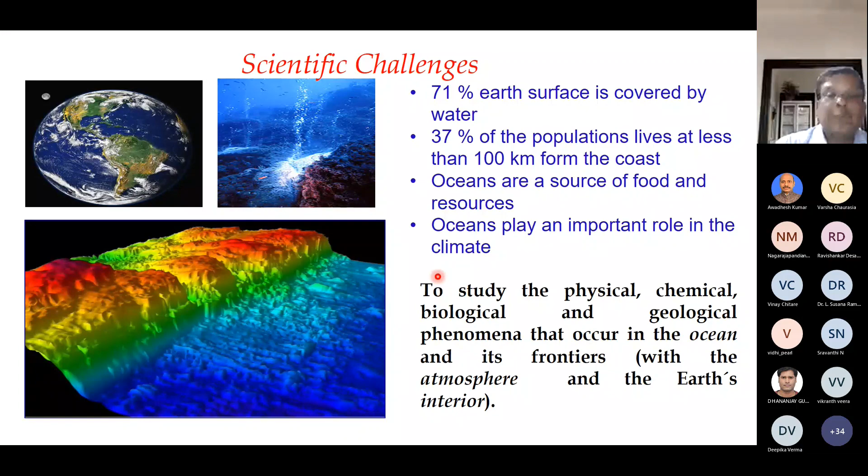So the research that is very challenging today is on underwater vehicles for oceanic exploration. So this is a scientific challenge that is addressed by marine vehicles, and we may note that a single autonomous or marine robotic vehicle may not be adequate to be deployed for a task that is not possible with one vehicle.

Rather, you can deploy a group of marine robotic vehicles for accomplishing a cooperative control task, so the navigation and control of such kind of robots is a challenging task to have this oceanic exploration.

So the classical method to explore the oceanic environment, the first one I display here is a vessel, marine vessel. This marine vessel is okay with some excellence towards the exploration activity, but it has poor maneuverability, and the three-dimensional coverage and time coverage is also not that impressive. Also, it involves high operational costs.

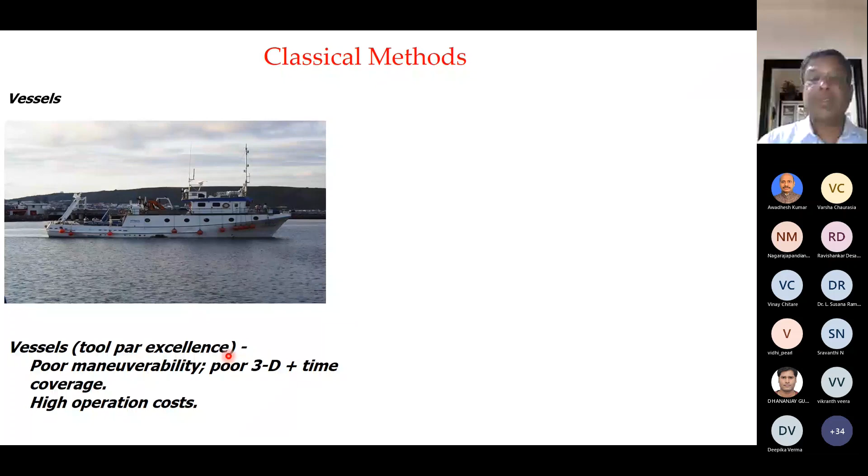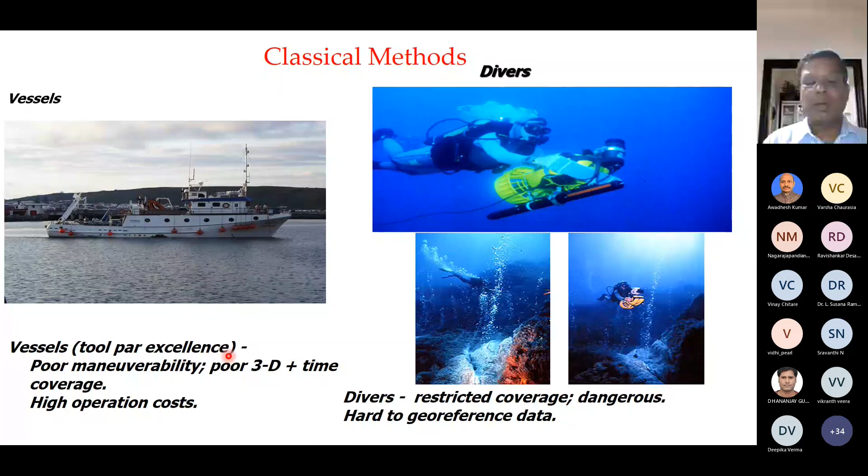On the other hand, we could deploy a diver for such exploration activities. But it may be a restricted coverage area, so a diver may not be able to cover a large area, and sometimes it may become dangerous, or it may be hard collecting the georeferenced data as well. So therefore,

after these kind of vessels or divers, the thrust was given to design remotely operated vehicles where the umbilical cord is a link to control the remotely operated vehicle. But gradually it was felt that to make it autonomous, we need to use the computing, control and all sensor technology, so that this underwater vehicle could be deployed in the oceanic environment for the exploration.

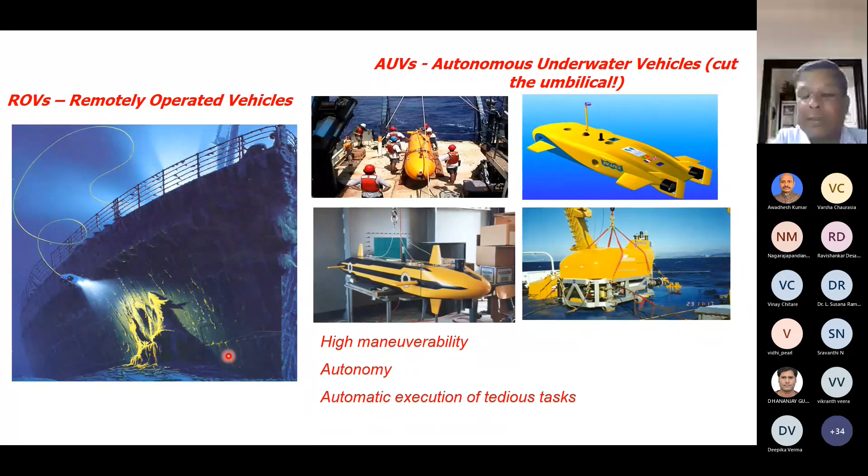And it is observed that these kind of autonomous underwater vehicles have high maneuverability, and good autonomy is established to accomplish automatic execution of tedious tasks. And the marine vehicles, if you look at it, they could start from the marine craft, which are very small ships or submersibles, and vehicles that do not travel on the land. They are only restricted to the oceanic environment, and they are called crafts.

So the vessel is basically a hollow structure that is made to float upon the water for the purpose of transportation and navigation, and it is larger than a rowboat. So the words vessel, ship or boat are often interchangeably used. A ship and a boat are basically different in terms of their size, by virtue of the following definitions as mentioned in the Encyclopedia Britannica. So that is one, the ship.

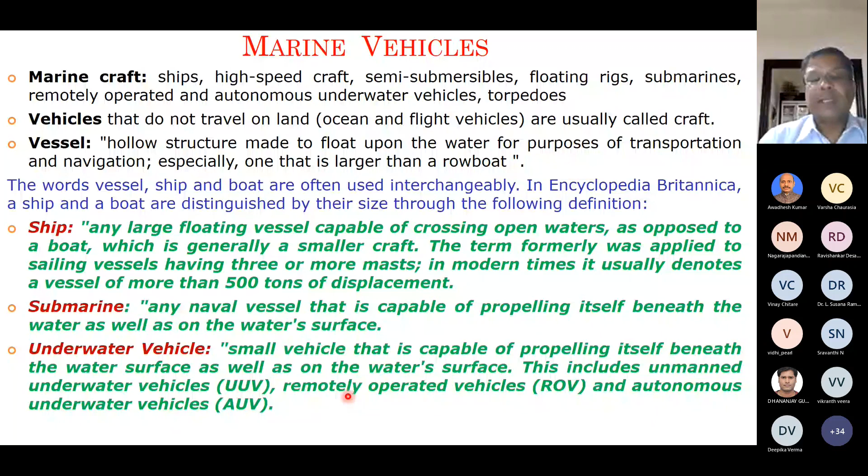The ship is basically a large floating vessel that is capable of crossing open waters as opposed to a boat, and basically it covers more than 500 tons of displacement, whereas a submarine is any naval vessel that is capable of propelling itself beneath the water as well as on the water surface itself. And the underwater vehicle is a small vehicle that is capable of propelling itself beneath the water surface as well as on the water surface.

This includes unmanned underwater vehicles or UUV, remotely operated vehicles or ROV, and autonomous underwater vehicles called AUV. So basically we have three marine vessels or marine vehicles: the ship, the submarine, and the underwater vehicles.

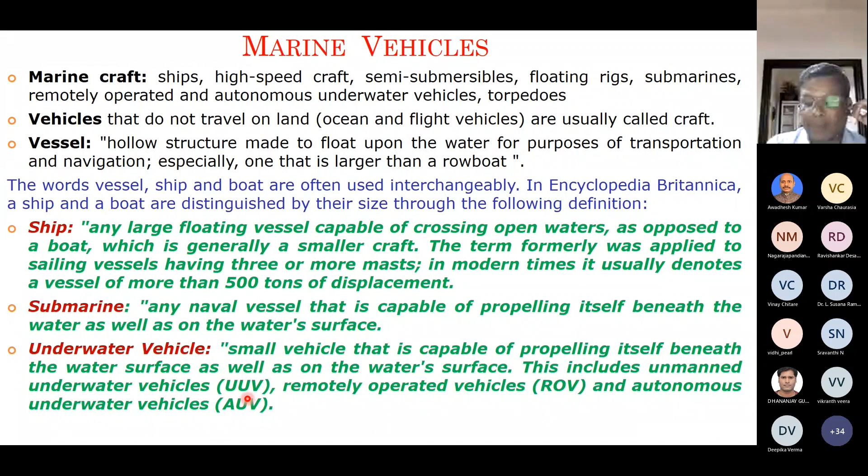Now the problem before us in underwater robotics: the first problem is, what force should I apply to achieve the desired speed? That is the control problem before us. And the second problem before us is the guidance. That means, how should I steer to follow the desired path? And next, what path should I follow? That is the path planning.

And where are the amphoras? So where is the mapping? Means you want to find out the sea floor, these aquatic animals there. You want to map the sea floor. And where am I in the motion, the navigation problem.

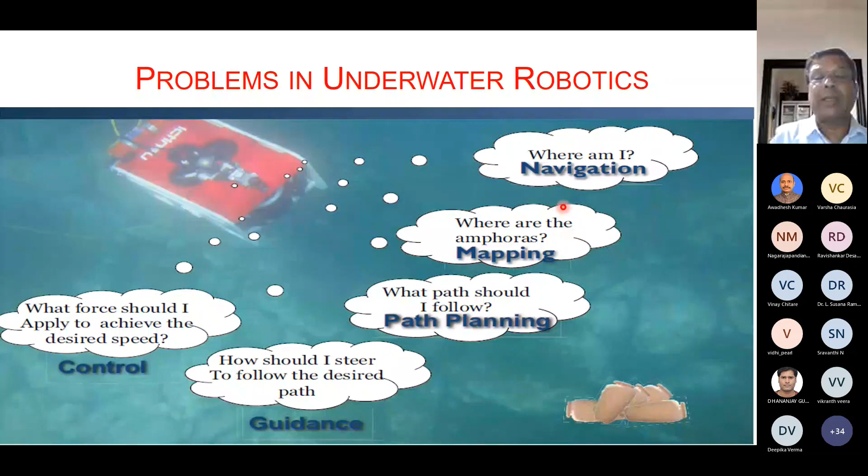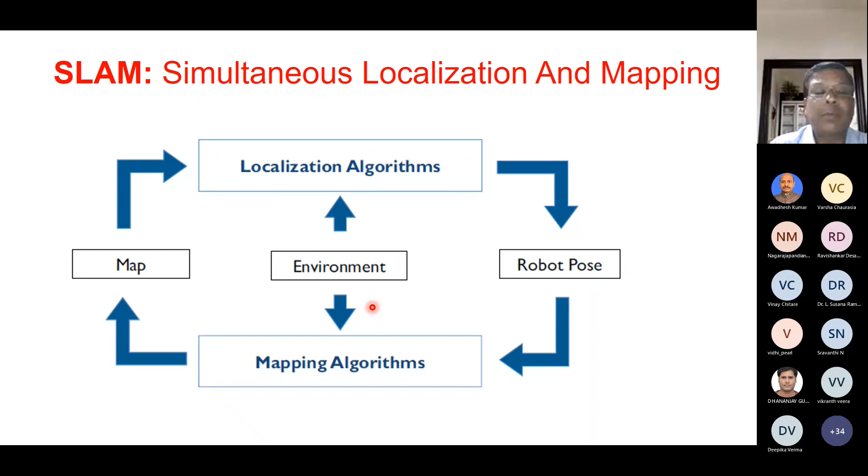So these are some of the problems that we encounter as far as underwater robotics is concerned. Now, one very interesting problem is called SLAM, that is simultaneous localization and mapping, where the objective is to design the localization algorithm so that we take care of the robot pose, and through the mapping algorithm you can map the sea floor, and of course the different environments inside the sea, what is there and how to map them by virtue of the localization algorithm. And the navigation problem is basically concerned with estimating position, orientation, and velocity of a vehicle.

The inertial navigation system, or INS, is a very popular sensor that is used in the navigation problem. In INS, three accelerometers are used for linear motion estimation, and three gyros are used for angular motion estimation. But these sensors are very expensive and they require accurate calibration, so there could be some drift in the position estimate over time. So we measure acceleration and angular velocity, and compute the linear velocity, position and attitude; this is what we are doing with respect to the navigation problem.

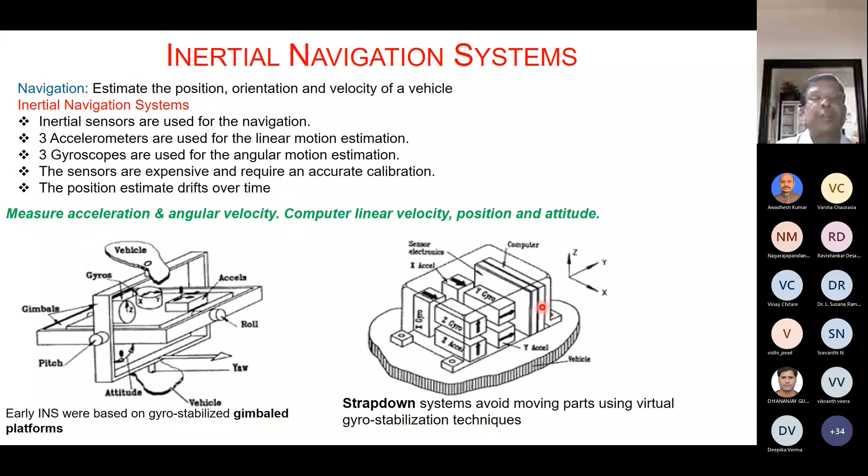And these are the two figures that show the earlier one and the new one in the INS, where no rotating part is here. We have all these gyros etc. there, which help to find the information needed for the navigation problem. Position, orientation, and velocity information are all obtained through this INS.

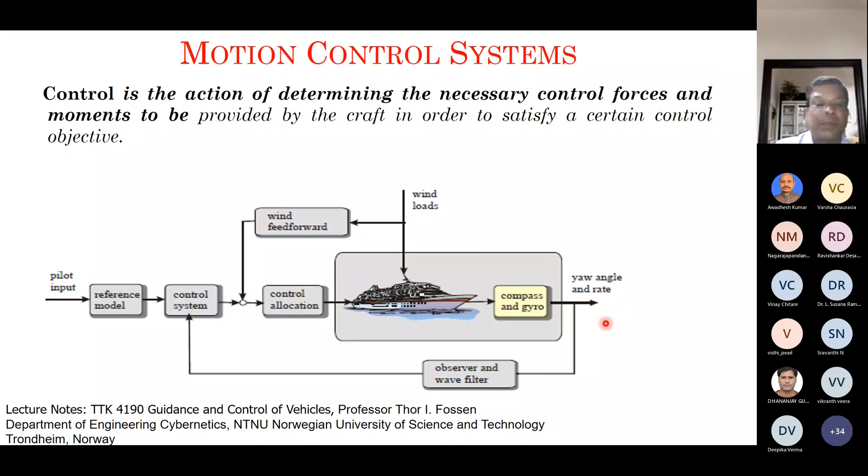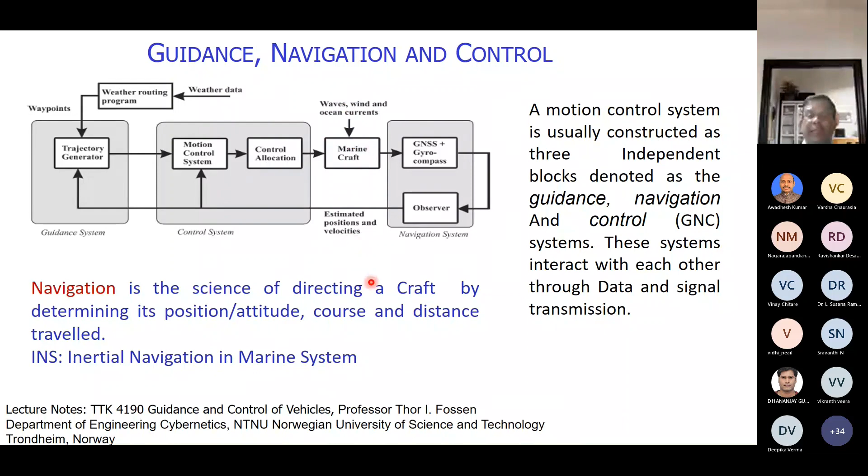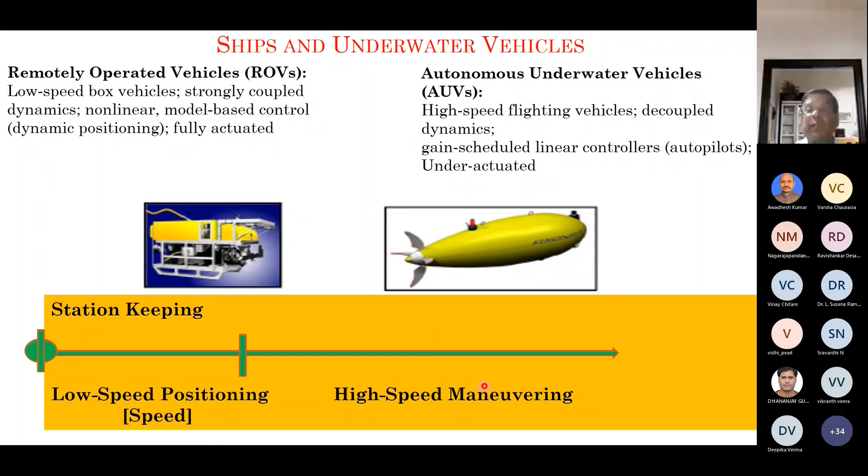That means the number of degrees of freedom is always more than the number of actuation points, actuators. So therefore these ROVs are suitable for station keeping, which are basically low speed positioning systems, whereas the AUVs are intended for high speed maneuvering.

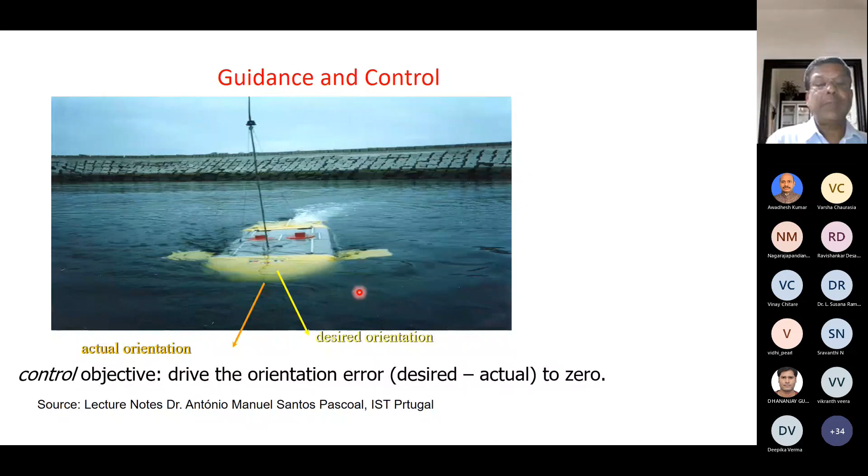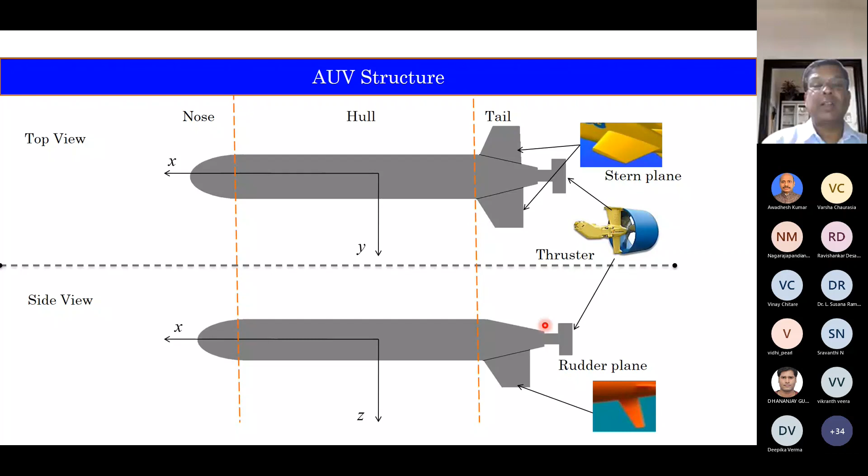So this is the typical AUV structure. It has a nose kind of structure here, and this is the tail, and the middle portion is the hull. And we have the thruster, we have the stern, and we have the rudder. So these are the actuating devices that are used to drive the AUV to control the motion.

And as I told you, the challenge before us is to control the AUV to accomplish the desired motion plan. But to do that, we have certain uncertainties, as you see. That means the ocean current is there, added mass is there, or there could be disturbances, or there could be uncertainties in the dynamics of the underwater vehicle. So all these necessitate designing an adaptive controller to get the appropriate motion control

objectives. So adaptive control, as you know, needs a model structure. You have to define a model and you have to estimate its parameters. Once you define a model structure and estimate its parameters, then if any change in the dynamics happens, the model parameters will change. As a matter of fact, the model will change, and in accordance with this change, you can design a controller whose gains are adapted with respect to the changes that happen in the dynamics.

So therefore, this adaptive controller is a class of controller where, depending upon the changes in the dynamics, the controller gains are changed, and there are different adaptive controllers, but the one I am interested to discuss here is the self-tuning controller, where at each sampling time the model is estimated, the model is identified, and therefore in case of the uncertainties you can achieve the desired performance.

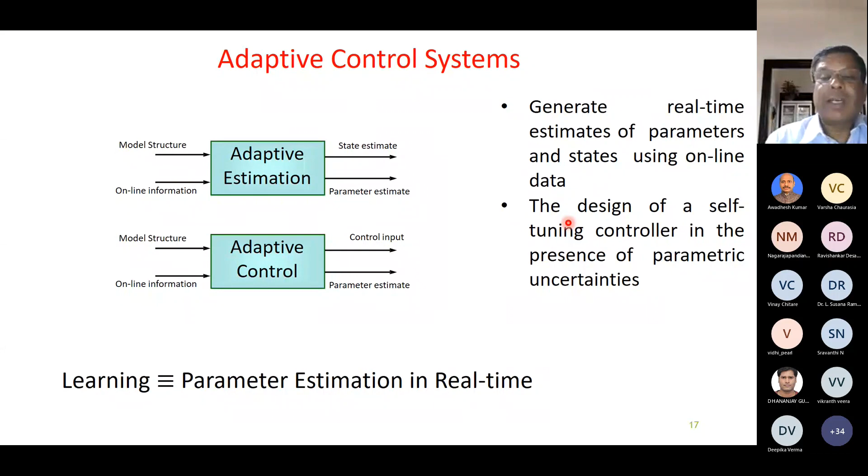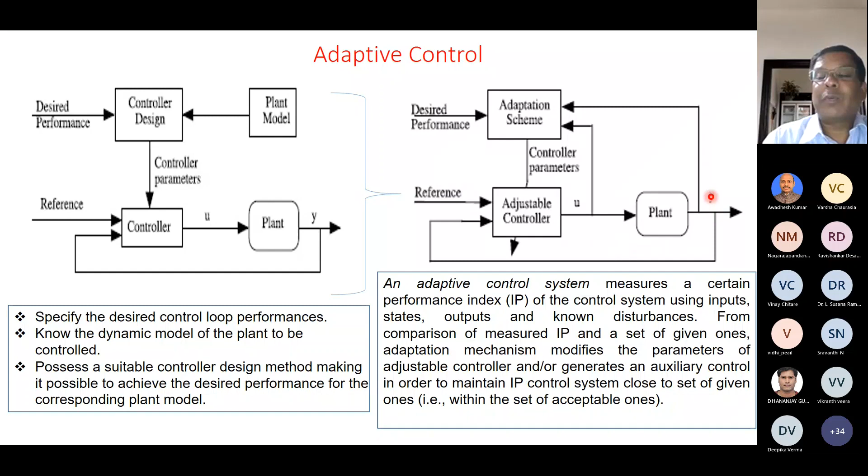So this is the direct and indirect adaptive controller. In the direct adaptive controller, we directly estimate the plant parameters, and then the plant parameters are parameterized in terms of control parameters, and they are estimated through any identification algorithm, and then these estimated control parameters are used to design the controller.

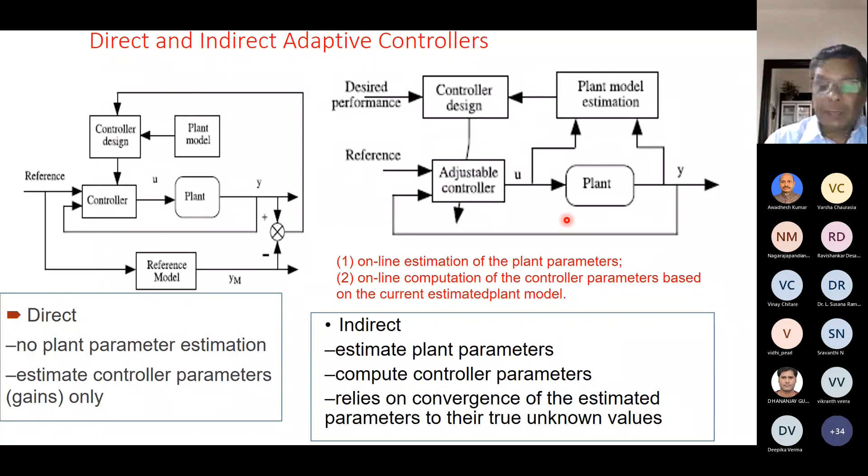But on the other hand, in an indirect adaptive controller, we have the plant and we have the plant model. We estimate the plant parameters, and those plant parameters are used to design the control parameters, and thereby you get the adjustable parameters of the controller. So this is called the adaptive controller in the indirect way of tuning or designing the control law.

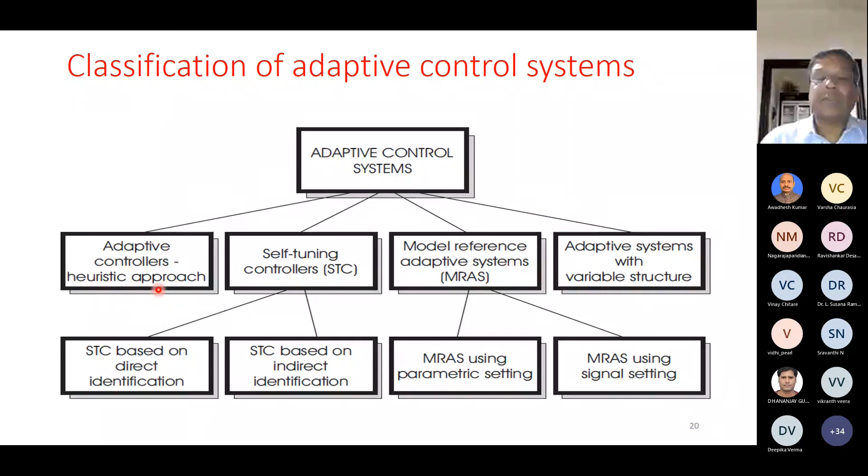And there are different adaptive controls available. We have self-tuning control, model reference adaptive control, variable structure control, and we have direct identification or indirect identification, and STC means self-tuning control, and we have the model reference adaptive system with parameter setting, model reference adaptive system with signal setting, and heuristic controllers are also there in the adaptive control domain. So one of these adaptive controllers is the self-tuning controller that is being used here for the autonomous underwater vehicle that I will be discussing.

And this book is a book edited by me and my friend Sanjay Sharma, and that is published by the IET.

So that is navigation and control of autonomous marine vehicles, that covers a lot of control of these autonomous underwater vehicles. So one such technique I will tell you today, that is the NARMAX self-tuning controller. NARMAX means nonlinear autoregressive moving average exogenous model.

So what is the problem for us is that we have the desired path, and the AUV is to follow this desired path. So the controller updates the path parameters at every instant, and then it provides the appropriate control to this AUV, so that the desired path is being tracked.

So for this path following control, there are certain control issues like uncertainties in the AUV dynamics, and there are disturbances because of ocean currents or sea waves, or in the acoustic medium the data rate could be very low, or there could be payload variation. So in face of all these uncertainties, the challenge for us is to design an adaptive controller such that we are able to follow this path accurately.

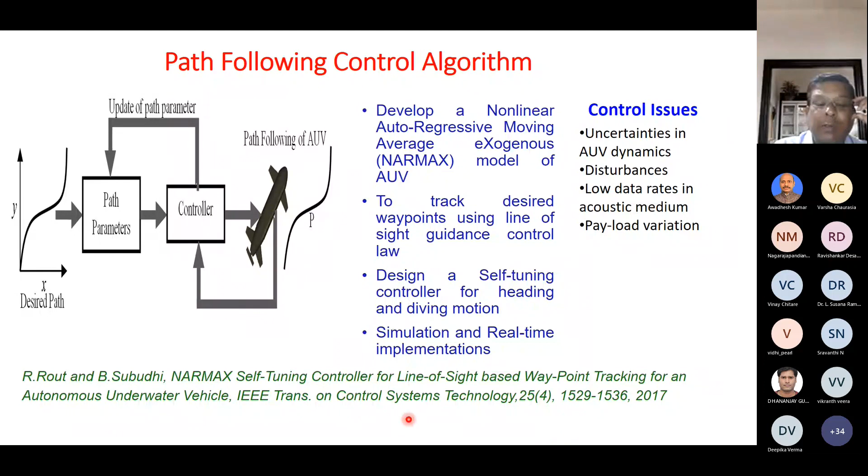So before going to design the controller, let me tell you the AUV kinematics and dynamics. So here there are 6 degrees of freedom of the AUV: surge, roll, heave, yaw, pitch, and sway. So x, y, z and u, v, w are basically the linear position and velocity. These are the angular position and angular velocities. And for the linear and angular motion, there are two frames. One is the inertial frame and the body frame.

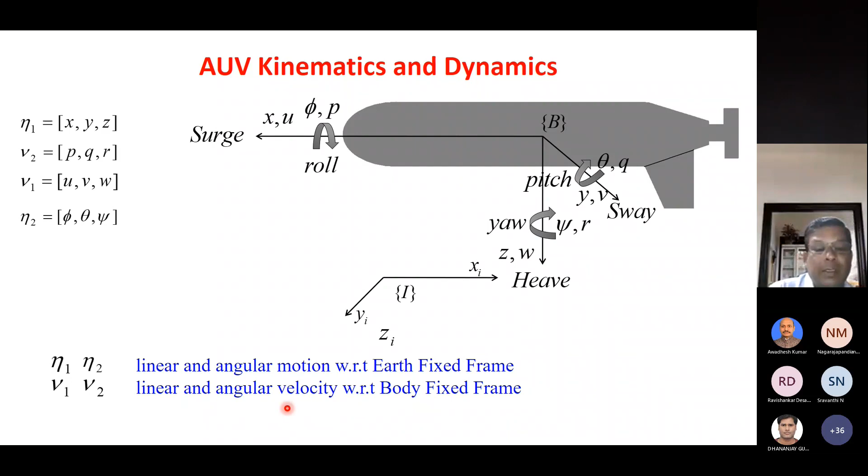So then these vectors like eta 1, eta 2 are basically the linear and angular motion. Okay, and this is the linear and angular velocity. v1 and v2 are linear and angular velocity with respect to the body fixed frame.

So what we do here, we develop a NARMAX model for the AUV. So here you see, this is the real or the hardware AUV, and we give some kind of input here and find out what is the output YP. And these are the tap delays. Z-1 is the one sample delay. So the previous instant values and the previous control values is the X.

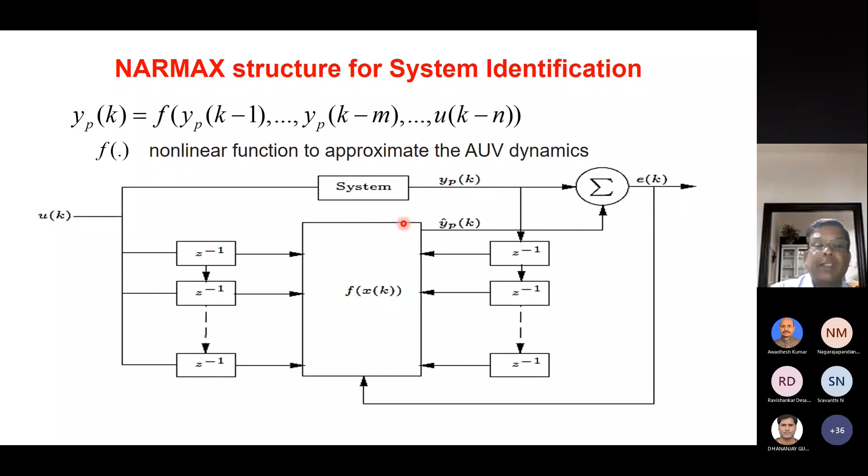And then our objective is to extract this linear and nonlinear relationship F between these past values of input and output, or U and Y. So eventually you get this model identified. And this difference between the actual output and the estimated output is E, and that E needs to be minimized in order to identify the dynamics accurately.

So we developed two NARMAX models, one for the heading motion that involves the sway motion and the yaw motion, that is V and R, V dot and R dot. And then we have the depth motion, that is W dot and Q dot. Pitch is Q and heave is basically W.

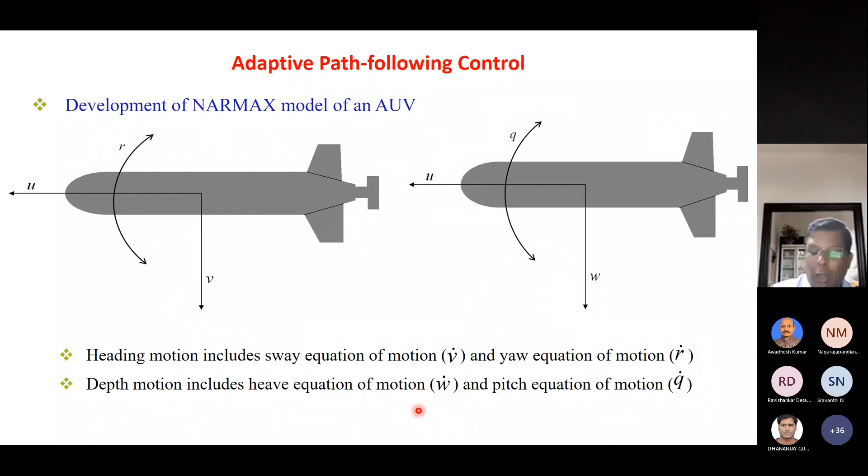And this is the heading motion NARMAX model, where VK and RK are the outputs, and the previous values are VK minus 1 and RK minus 1, and these are basically the functions, and delta R is basically the rudder input, and this is the error signal. So F1 can be written as different constants and the previous values of VK minus 1, RK minus 1, and so on and so forth. And G11 is basically alpha phi 1, and G21 is beta phi 1.

So similarly, the NARMAX model for depth motion we can find out. We can represent it as W and Q for the kth instant, which is a function of the past values of W and Q, the output, and then the input, the stern input delta S, and the error signal. And these are the representation, that is different constants, alpha 02 to alpha 42 and beta 02 to beta 42, and this is alpha 52 and beta 5.

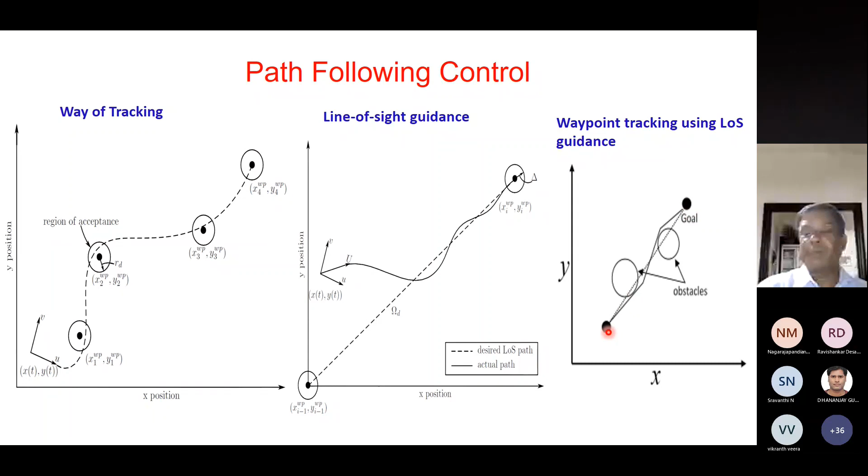So the path following control problem: we define some waypoints, waypoint 1 (x1,y1), waypoint 2 (x2,y2), and waypoint 3, and so on, and this is the region of acceptance. We design a line of sight guidance strategy in which the previous waypoint and the current waypoint are connected by a rectilinear path, and this is the actual path. This waypoint tracking using the line of sight guidance law aims to follow the desired path while avoiding obstacles, so the starting point and the goal can be reached following this path.

The Narmax model-based self-tuning adaptive controller we are designing here handles two motions. One is the heading motion that involves three variables, V, R, and delta R, where V and R are the angular velocity and position, and delta R is the thrust, force or torque. Similarly, W, Q, and delta S is for the diving motion.

So we have two models, Narmax model one for the heading motion, the other for the diving motion. I equal to 1 is for heading motion, I equal to 2 for diving motion. The output, in the previous case, is the output for heading and output for diving; in general we can write this as y equal to phi transpose theta I.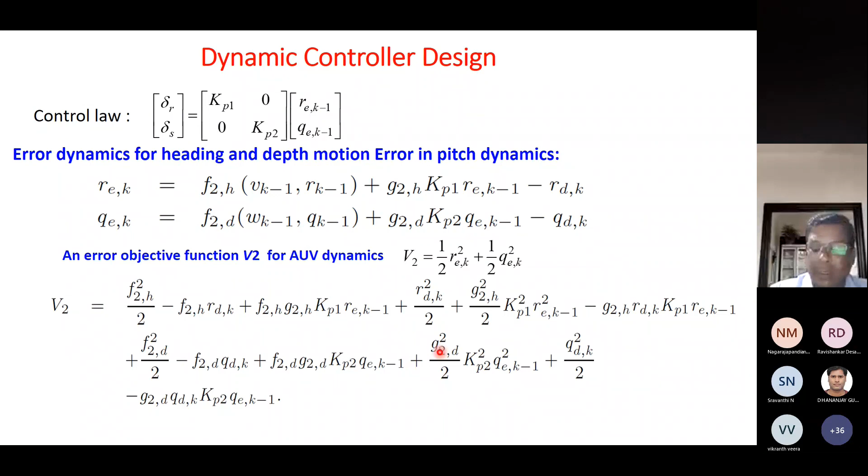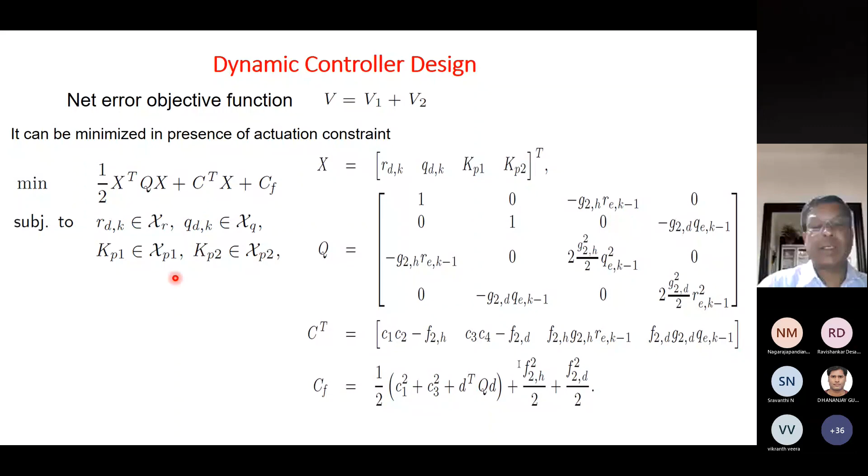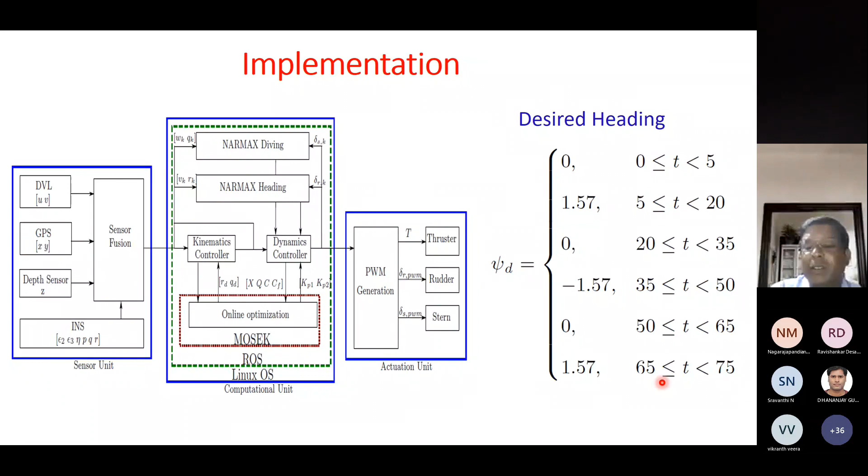These are the three actuators, and we have considered a desired heading: for 0 to 5 second is 0, 5 to 20 second is 1.57 - this is the oriented desired heading - and 20 to 35 it is 0, and 35 to 50 it is minus 1.57, and 50 to 65 it is 0, and 65 to 75 it is 1.57.

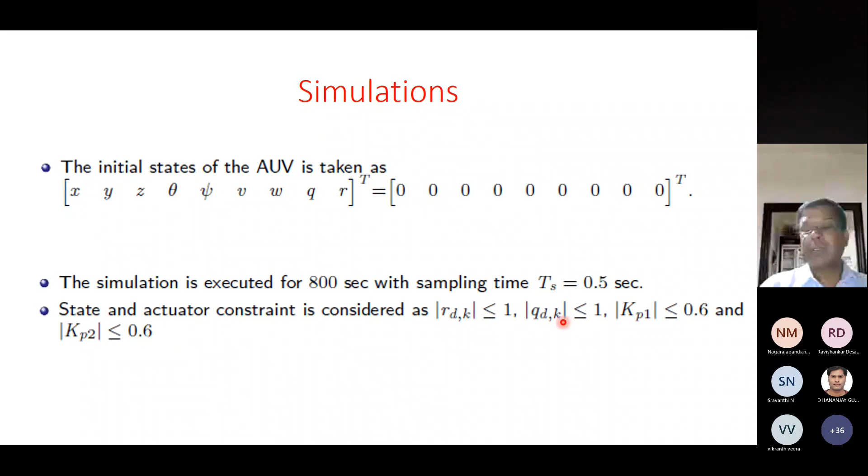So we chose the initial state of the AUV as all 0, and then we pursued the simulation for 800 seconds with sampling time of 0.5 second. We define the saturation, actuator saturation, that R is less than or equal to 1 and Q is less than 1, and these two gains are less than 0.6 each.

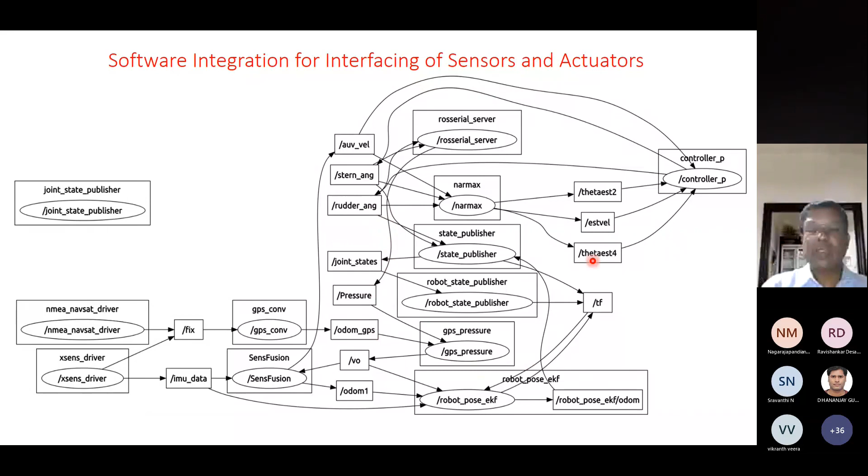So we use a robot operating system and define different tasks, and to integrate the sensor fusion, like we have the different velocity, angular rudder angular acceleration, joint states. Then we measure all the variables and integrate them by using the robot operating system.

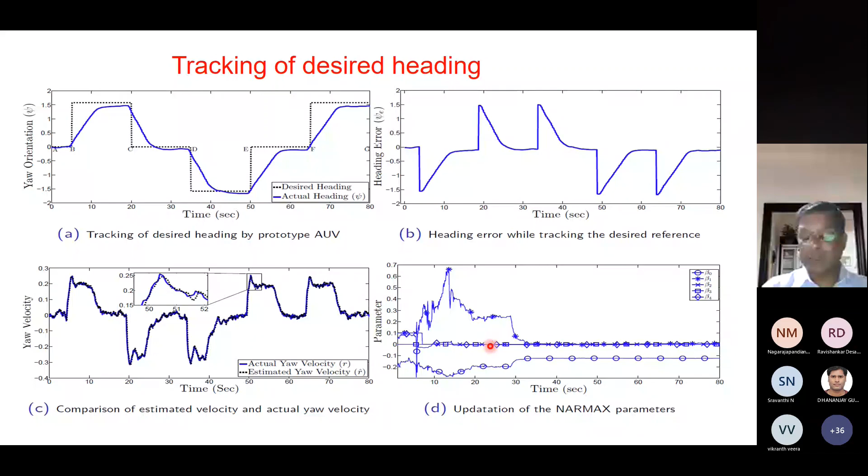The estimated velocity is the dotted one, and the blue line is for the actual velocity. So the estimation is good, and the parameter estimated - this is the plot that shows the different parameters like beta 0 to beta 4 with respect to time, so how they are updated with the control, and the tracking of desired heading by the prototype AUV.

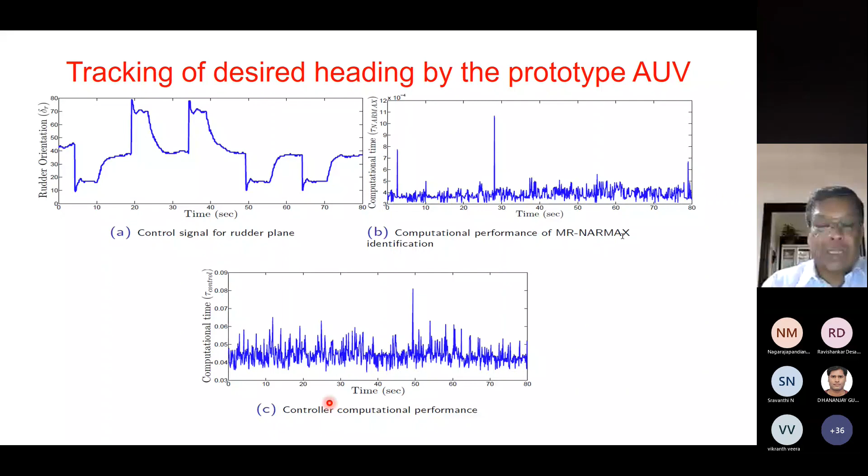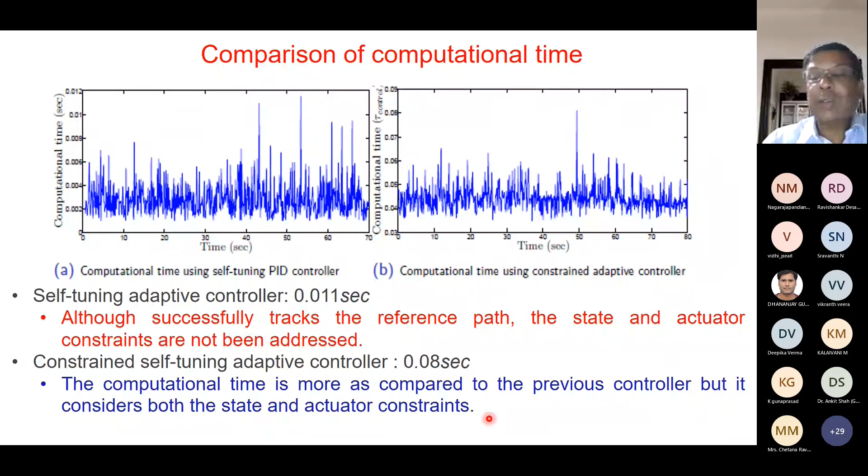Okay, so, let me show a...

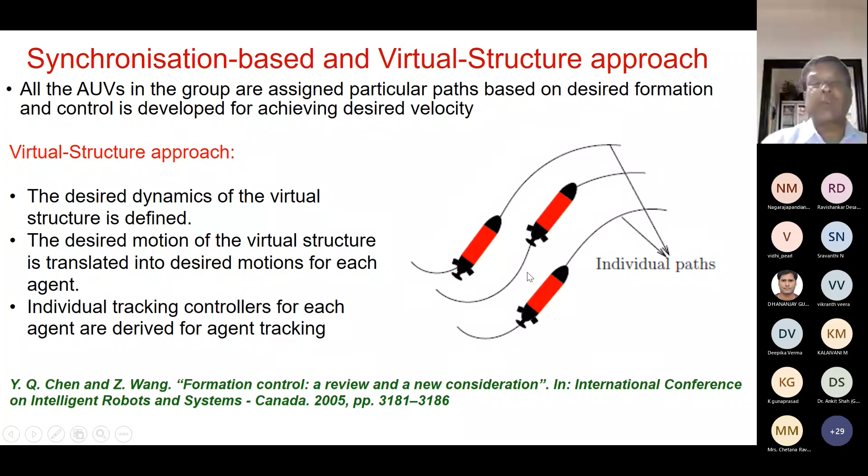So this multi-agent based control, where an individual vehicle is considered an agent, and the communication between these agents can be represented by a graph, and thereby we can use graph theory to design a controller based on this multi-agent approach. This is the leader-follower approach, where the path is defined for the leader, and the followers communicate with each other.

The followers communicate in between. Not all the followers communicate. So depending upon the communication, you can have your graph, and from the graph you want to design a controller, that is called consensus-based control.

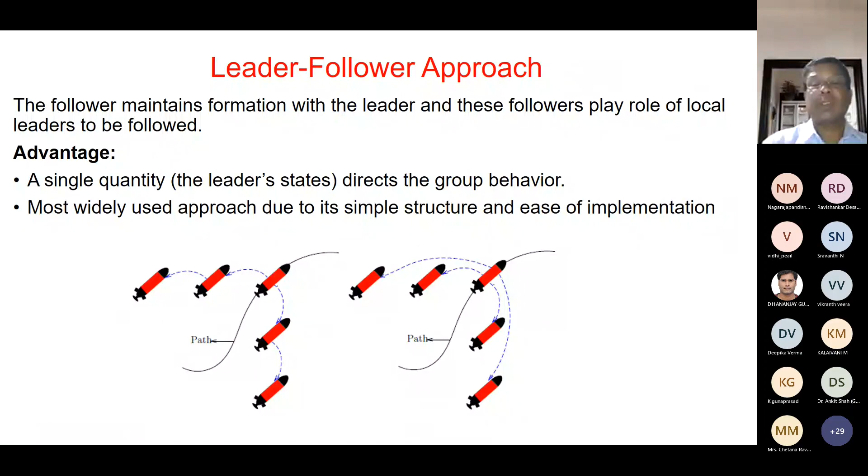That means all the agents should reach a consensus, or maybe a desired value, to achieve this leader-follower group motion. And there are some conclusions of this work.

So to capture the unknown dynamics, or rather in case of uncertainties, we can design an adaptive controller, and here we have chosen a NARMAX, the non-linear autoregressive moving average exogenous model structure, and we have used the recursive extended least square algorithm to estimate the parameters of this model.

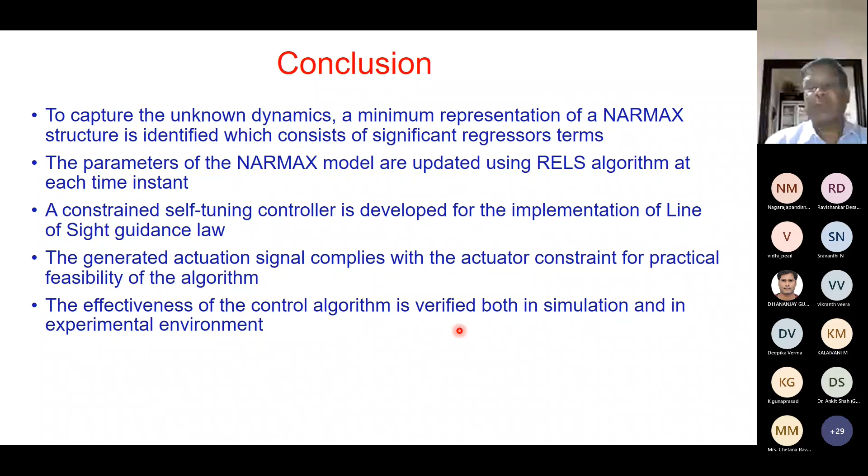We have also developed a self-tuning controller and implemented it through the line of sight guidance control law, and the actuation signals are generated while considering the actuator constraints for practical feasibility of implementation of this algorithm. And the effectiveness of this control algorithm we verified both in simulation as well as experimental environment.

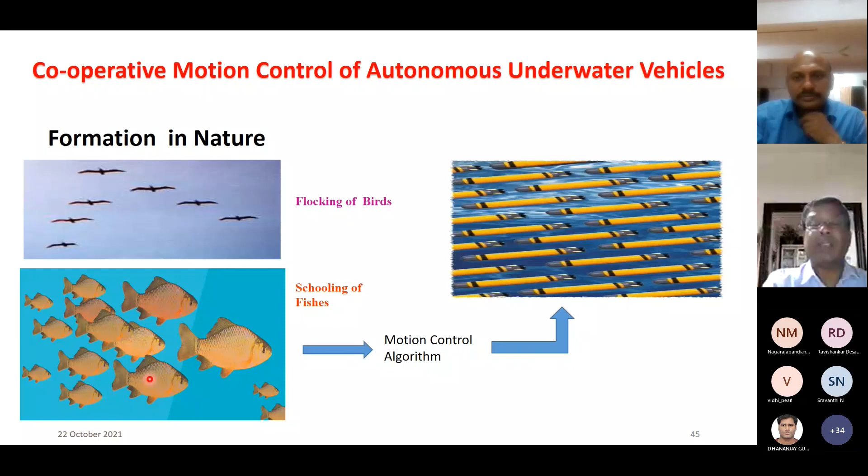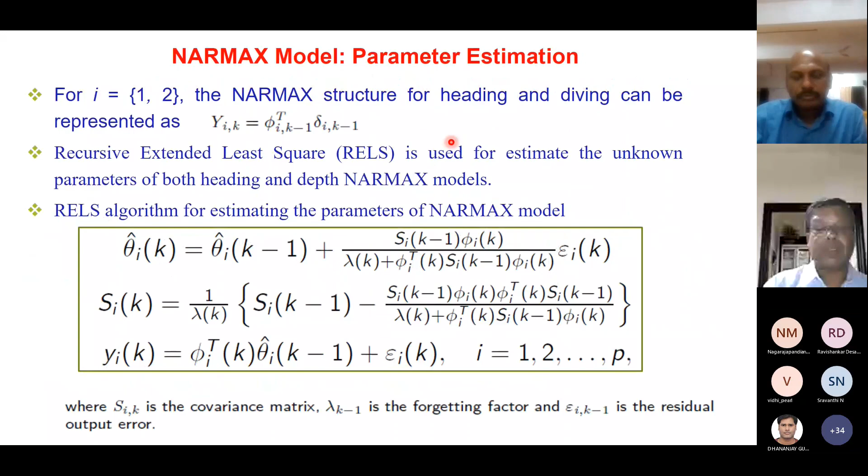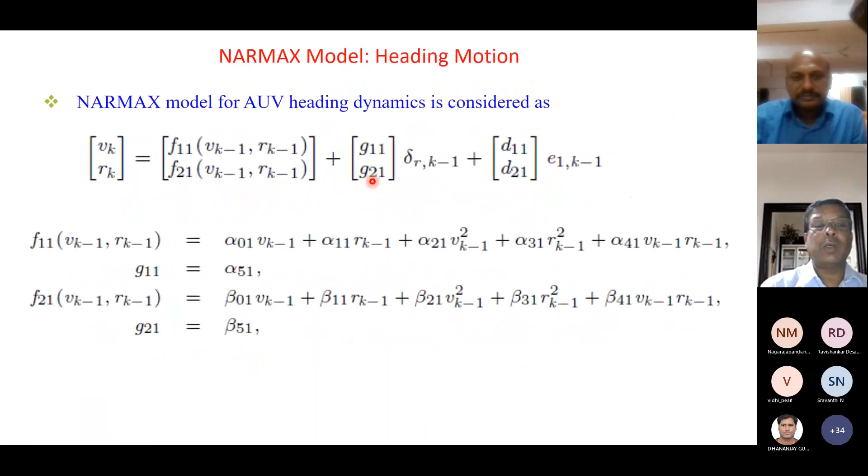So for that, what we adopted is that we pursued a system identification in which we have done two things. One, we have chosen a model structure called NARMAX model structure for heading and diving motion. And then we employed an estimation algorithm to estimate these parameters. So this is the recursive extended least square estimation. And we have represented the dynamics in these two models. One for the heading dynamics, this model. Another is for the depth dynamics.

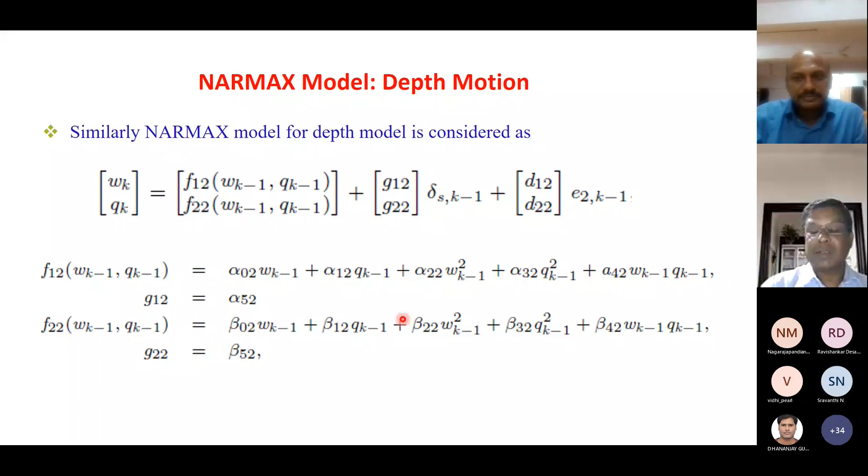So these are the coefficients, alphas and betas. These are estimated by using this RLS algorithm. And once you estimate, let us imagine at k equal to 0, you give this input and output and estimate these parameters. These are used to design the controller. This is how we proceed. Okay.

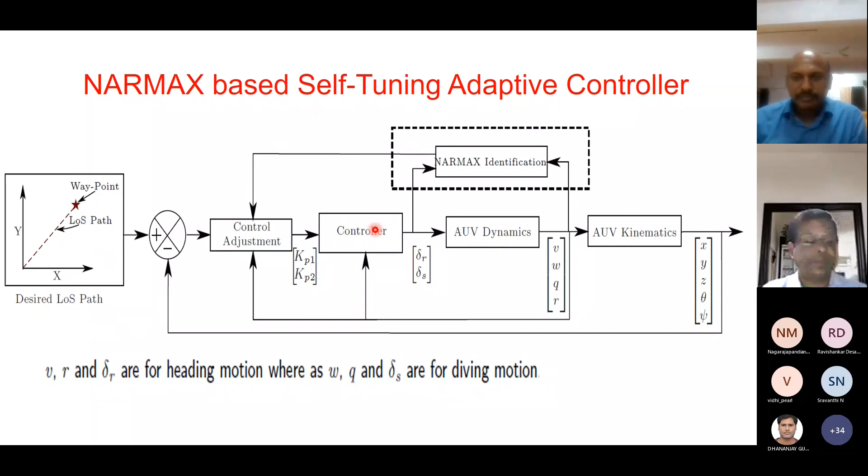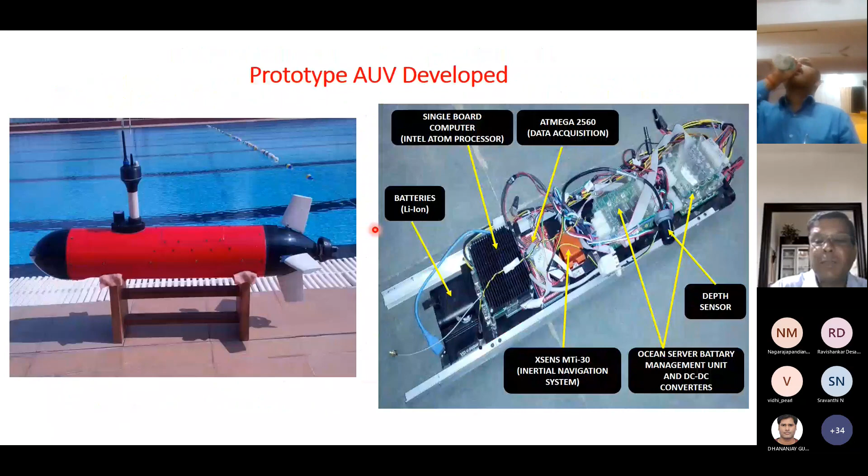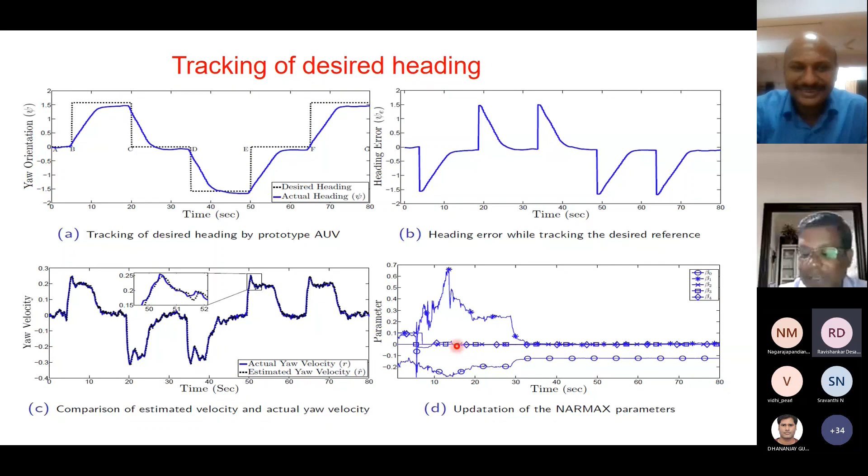Actually, I'm working on the same area, sir, and I'm referring to almost all your papers. Okay, that's great. Very good. What is your name, please? Sir, it's Ravi Shankar Desai from BITS Pilani, Goa. BITS Pilani, Goa. Okay. Why don't you meet me sometime in IIT Goa? Okay, sure, sir. Definitely, I'll meet you. I believe he was waiting for your lecture, very eager to listen to you. Good. You're working in the same area, and I'm interacting with you, sir. Okay, that's very nice. I will be very happy if you can do something good in this area. Very interesting area. Thank you very much, sir.

I believe you are satisfied, Dr. Desai. Yes, sir. Very thankful, because I'm very eager. Actually, the lecture was not cancelled; it was just postponed. I informed everything in the WhatsApp group. Probably you have not seen that. Okay, sir. Anyway, I'm very eager to listen to Subudhi sir's lectures. Okay, great. Thank you for giving me the opportunity, sir. Anyone else? Okay.